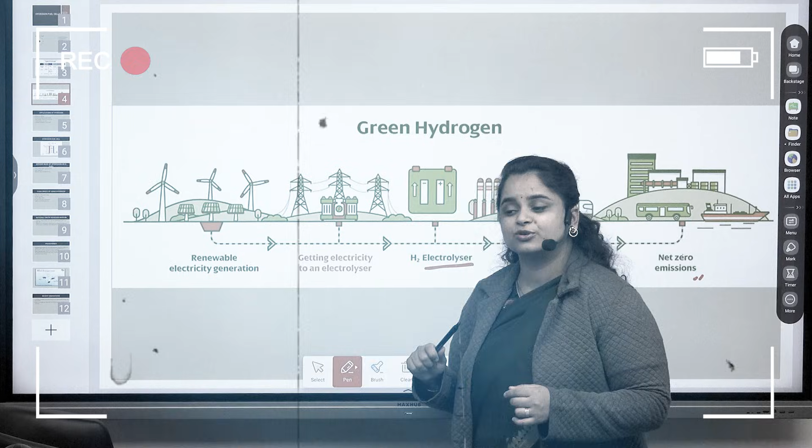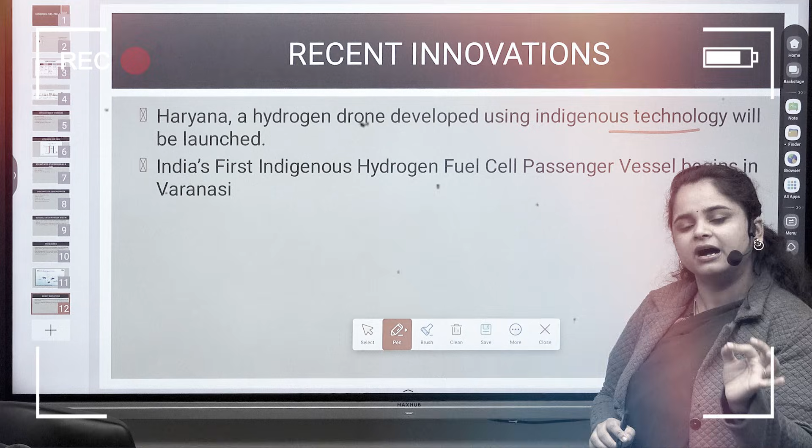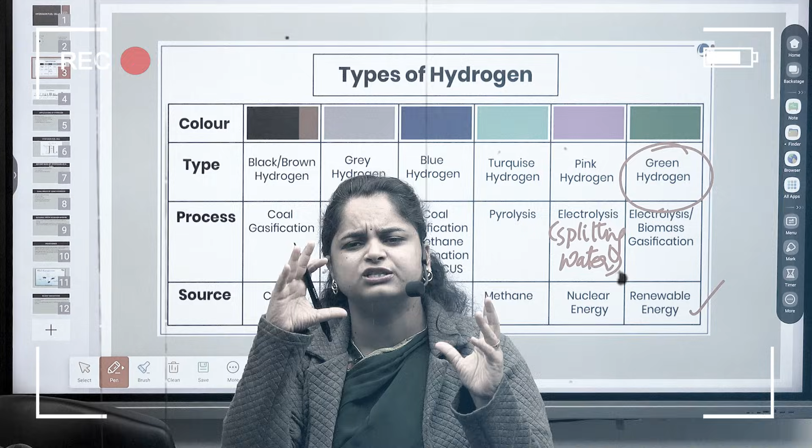What is, of course, India's roadmap? How are we planning to grow this or take this forward? So you have petroleum, it burns, it gives you energy. Hydrogen is not like that. The problem with electrolyzer is that we are not manufacturing any electrolyzers in India. Using hydrogen cell, they've powered a drone. It's a completely indigenous technology. Every part, every segment is made in India. India is specifically focusing on this. We are talking about green hydrogen, and India is the one who is promoting this on the biggest scale in the world. Our capacity will be immense, and we will be very soon exporting this green hydrogen to all parts of the world.

Hello everyone. Today we are going to talk about hydrogen fuel cells. This is one key area where there are a lot of developments taking place, and it is a very big mission, a very big motivation, something which the government of India is really promoting. In the energy sector, earlier we had solar. India was instrumental in pioneering the whole process of making solar energy a very big initiative, a very big endeavor. That's the similar thing which they want to do with hydrogen.

So we are going to understand the science behind it. We are going to understand how this works, what is the significance of this, and what is, of course, India's roadmap. How are we planning to grow this or take this forward?

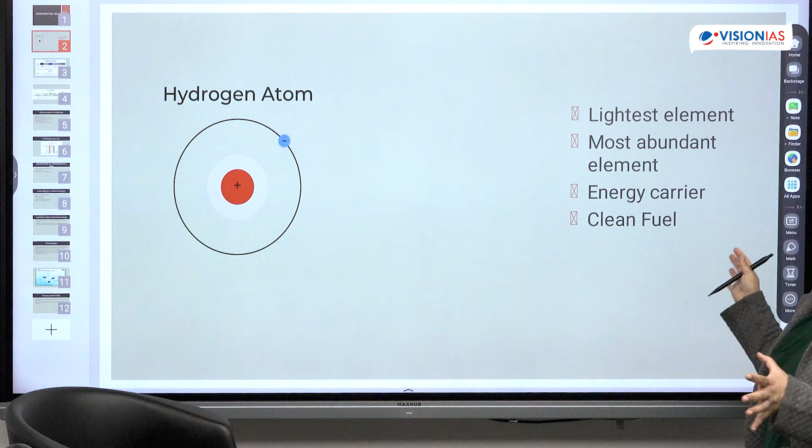First, let's talk about hydrogen, right? We all know about hydrogen. This is what your basic hydrogen atom looks like. It is the lightest element in nature. It's the first element in the periodic table. It is also the most abundant element in the universe. If we look at the entire universe and its composition, it is made up of hydrogen in the highest capacity. Now that means availability of hydrogen will not be a problem, right?

So here, the hydrogen basic atom structure. There is a proton. If you understand basic atom structure, you know about parts of the atom. So you have protons and electrons. This has one proton, and around this there is one electron. That's the basic structure of a hydrogen atom.

Now, because of this structure, or because of this being very light, its nature is, as you know, gaseous. So hydrogen exists as a gas, so it will have a very high volume. There's a lot of volume density associated with hydrogen gas, and movement or capturing it and storing that in that sense is one part which is tricky. Because if something is gaseous and you have to move it around, you will have to either have very large containers, because the gas is taking a lot of volume, so you need big, huge volumes of containers. Or you can liquefy it, transfer it in a liquid form. For that, either you need very high pressure, very intense pressure, or you need to bring the temperature to very, very low degrees. Extremely low temperatures can also help in reducing that volume, and that is what can facilitate or help in storage or carrying of that hydrogen gas.

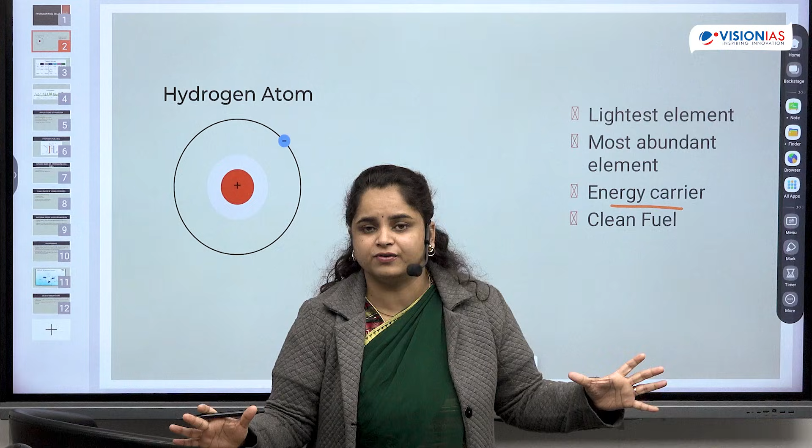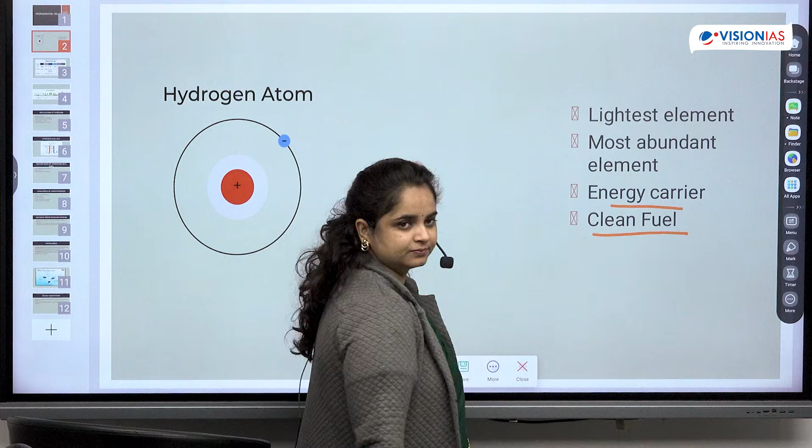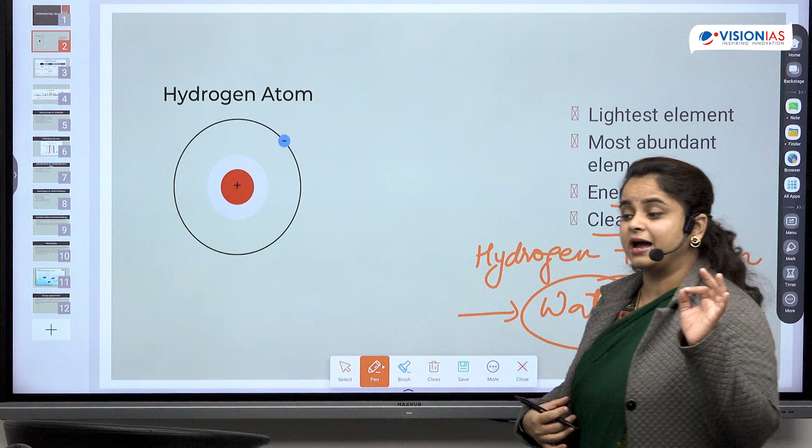Okay, so in that sense it's like a secondary fuel, so we use the word energy carrier. But once it is used as a fuel, it's going to be a clean fuel, because this is a basic concept which all of you will understand. So hydrogen along with oxygen, so that burning of the fuel takes place in air which has oxygen, and what you're going to get out of it is water. This is the brilliance of this whole process, that the byproduct which will come out, of course, along with this energy, that's why we are calling this the fuel. So the byproduct which is coming out is water. This is the big property which we want to extract by using hydrogen as a fuel.

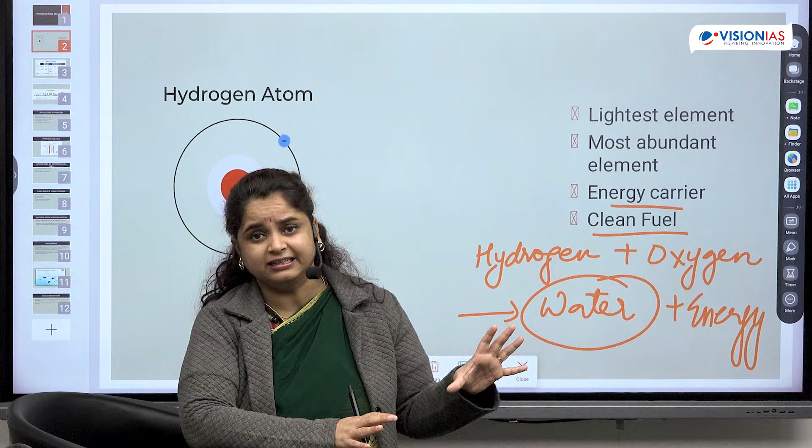Because the fuels which we are commonly using, the organic compound based fuels, petroleum based fuels, so everything from petrol, diesel, even things like coal, they are all producing byproducts which are harmful for us. You have harmful gases like carbon dioxide, carbon monoxide, then sulfur related gases, and different kinds of fuels also give a lot of particulate matter, harmful material being released into the atmosphere, and the problem which we mainly discuss in the form of carbon emissions. Carbon emissions is the biggest challenge to the environment.

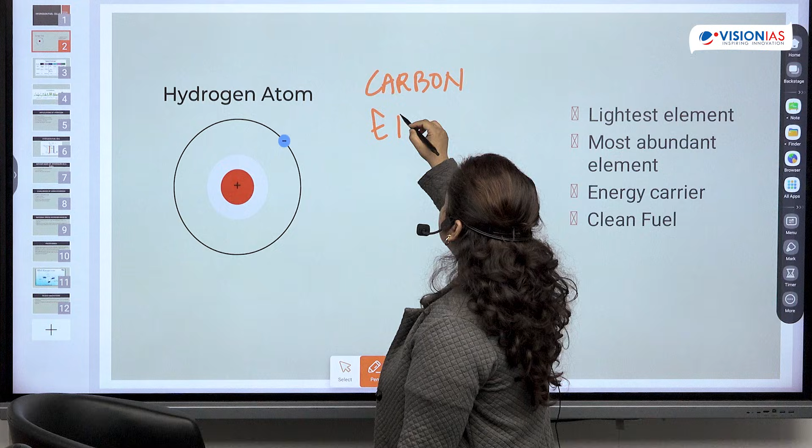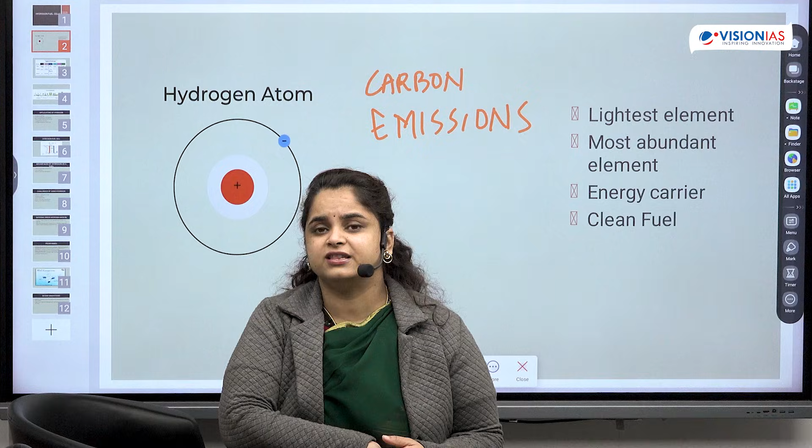Development in any sector is threatened because it becomes very polluting. It releases carbon emissions that increase temperatures of the world. You have global warming, climate change, increasing at a scale which is very difficult to manage with current technologies. So there is a need for alternatives, and hydrogen is a wonderful alternative because there is no carbon emission.

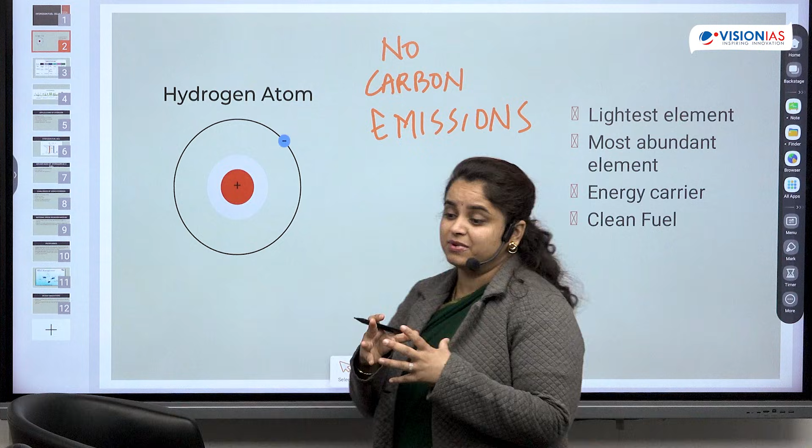In using hydrogen as a fuel, we can make fuel cells out of it. This is also our main topic. These fuel cells will use hydrogen and oxygen and will give you water, which is clean, non-polluting, non-threatening to the environment. So any goals we have for the environment would need hydrogen.

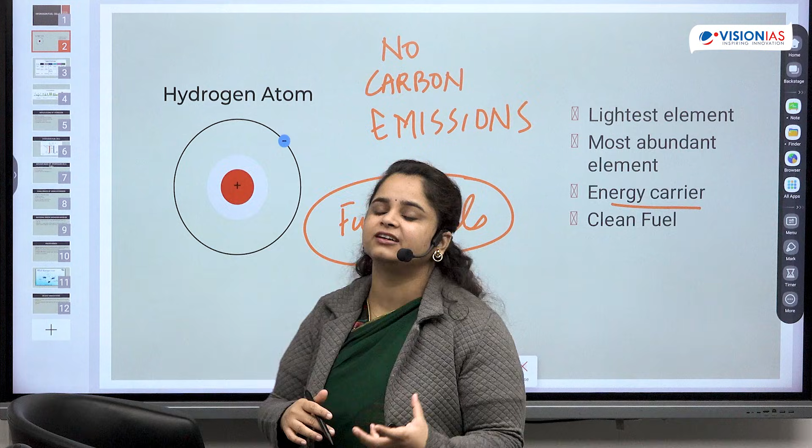We're trying all kinds of technology which can help us reduce carbon emission. One very promising technology has come in the form of hydrogen. The only question is, how is this hydrogen being created? It's an energy carrier, present in different things, and you have to extract it to be used. So that extraction process is very energy intensive. A lot of energy goes into actually getting usable hydrogen.

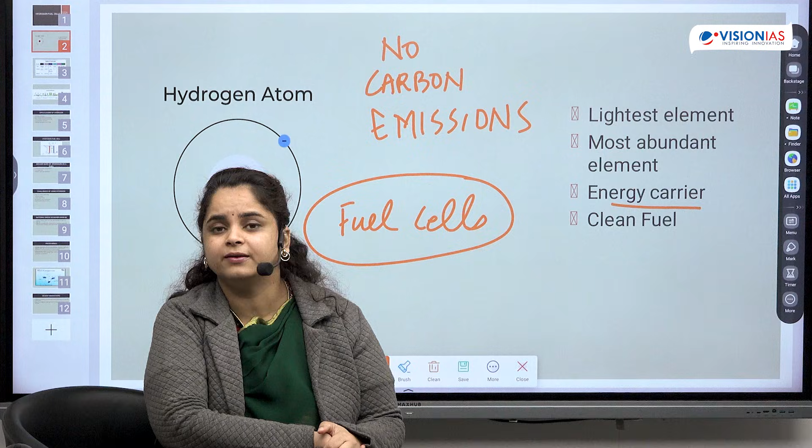So how is that process done? How is energy being used for creation of hydrogen? That will become the clear deciding factor of what kind of hydrogen we need. So we usually use the methods of production of hydrogen to give our understanding on different types of hydrogen.

This is a color-coded standard nomenclature. You give different colors to the different processes through which hydrogen is produced. This is very key for you to understand and know all of this. We'll talk about them one by one.

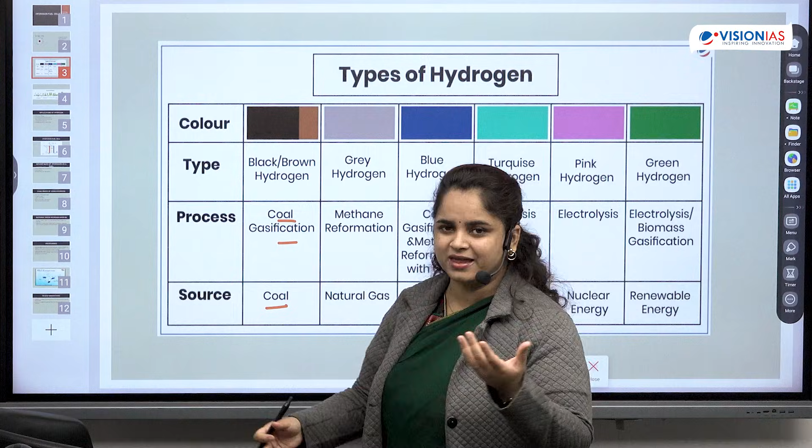First is black or brown hydrogen. This process uses coal, and coal gasification process is used to remove hydrogen. Like I told you earlier, hydrogen is present in fossil fuels, so from that we can extract it. In this they are using coal. Coal means there will be carbon emission, there will be carbon residue, right?

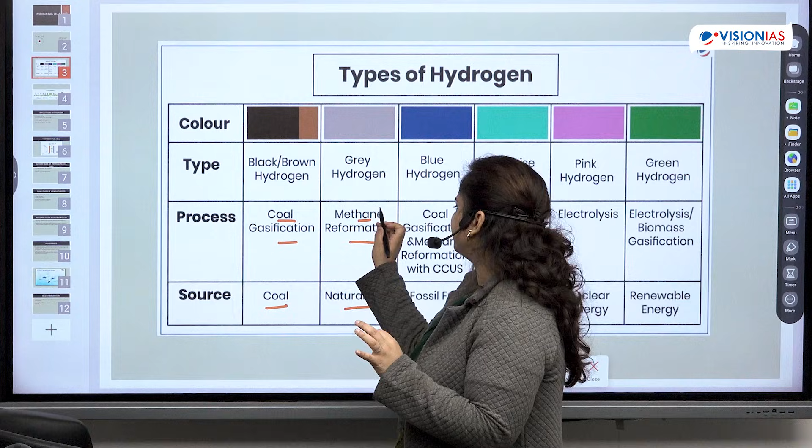Then you have gray hydrogen, in which you have methane reformation. This comes from natural gas. Natural gas has many things, but the key component is methane. So what they do is take this methane or natural gas, and along with this give steam at very high temperature, and as a result, hydrogen is produced.

This gray hydrogen is the world's most widely used process for producing hydrogen. In fact, more than 90% of the world's hydrogen is produced by this method, the gray hydrogen.

The big reason for this is it's very economical. Any industrial process, the cost factor is a very key thing for understanding if it's going to be used or not. Whenever we talk about replacement into another method, one of the biggest barriers is cost. The cost is so high that the industrial process will not become profitable otherwise. So this is the most profitable.

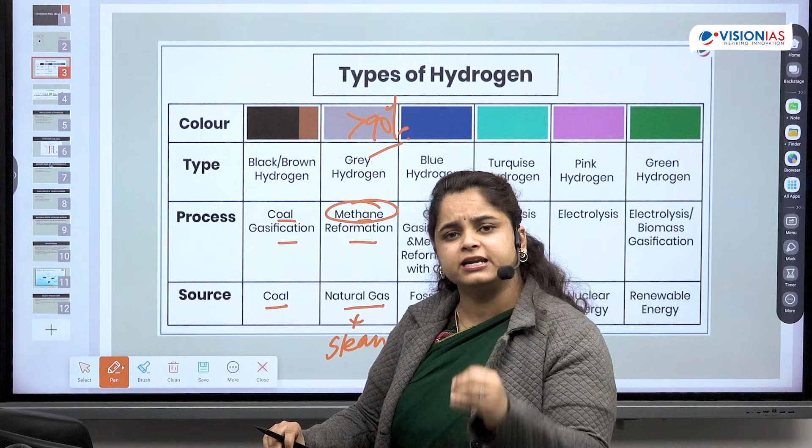Natural gas is available, and in that you can easily produce gray hydrogen. So it's the most widely used process globally. If I take you to specifics in India today, almost all the hydrogen being produced is gray hydrogen. Okay, so this is the key process.

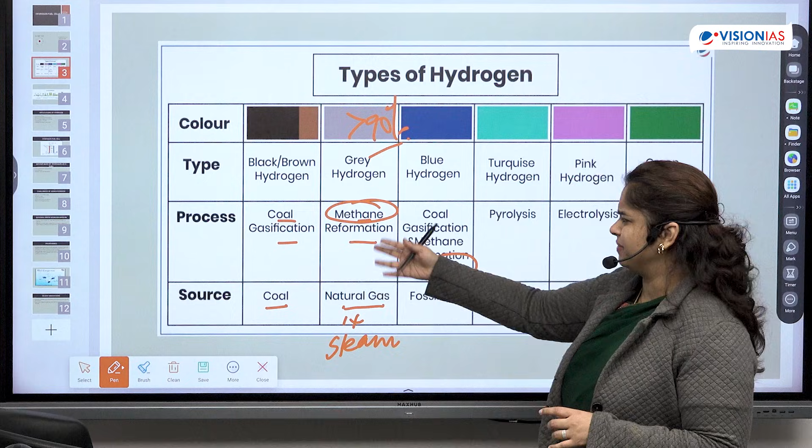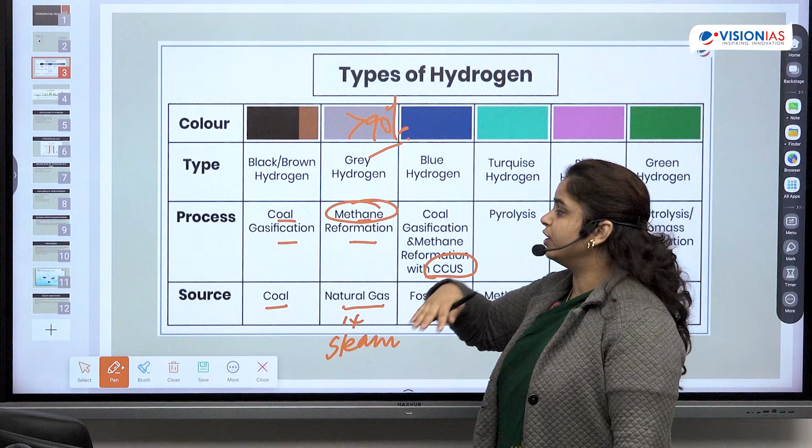Let's talk about others. Then you have blue hydrogen. This is coal gasification and methane reformation with CCUS. Now this is what is important, this is what changes. Methane reformation or coal gasification alone is just black or gray. But this point is the game changer, which changes it from being a carbon emitting to a non-carbon emitting method.

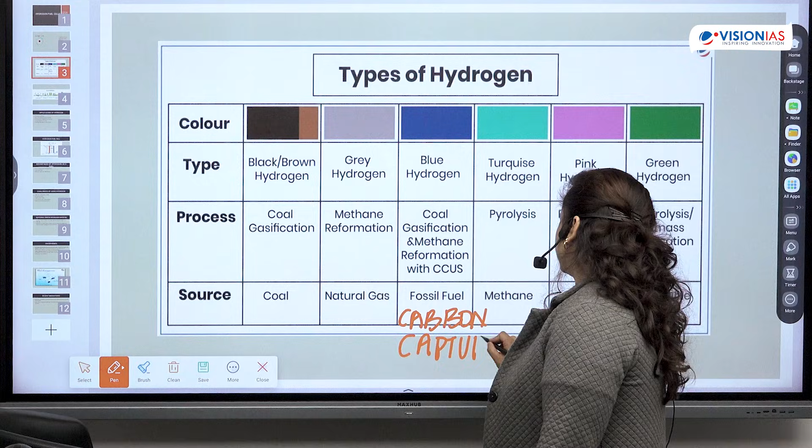What this means is a very important concept. So this is carbon capture, utilization, and storage.

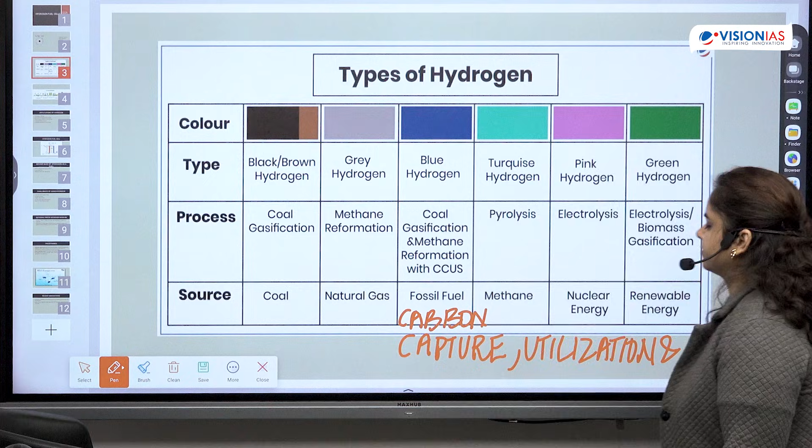This in itself is a very innovative technology. This is really being discussed a lot globally, a lot has been talked about it. If we talk specifically about our exam, the UPSC exam, they've also mentioned and taken up this topic in the exam. So what is done is, you take normal coal gasification or methane reformation, you will get some carbon emission.

But once that carbon emission is there, you have a process to capture that carbon, utilize it, or store it. There are methods available for that, the technology is available for that. That means ultimately no carbon emission comes out. So even if carbon emission or byproducts were there, you have captured it. So this blue hydrogen is also a good method, an environmentally friendly method. It will involve a lot of technology intervention because it needs some specific technologies, but on the whole, this is something which should be encouraged, which should be promoted.

India is talking about this blue hydrogen also.

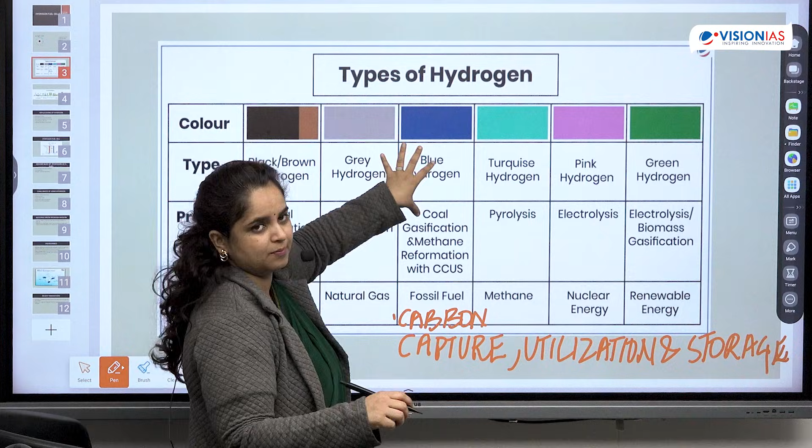Then you have turquoise hydrogen. Pyrolysis just means breaking down at high heat, at high temperature. So from methane, we can get hydrogen through this method.

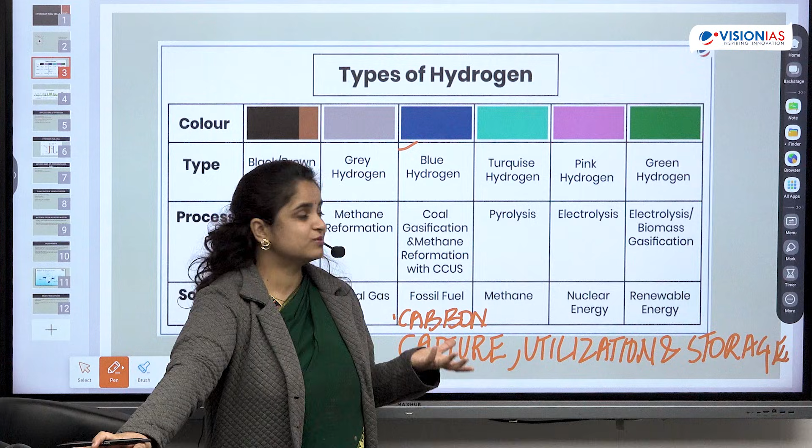Then you have electrolysis. Now this electrolysis is the method which is, you can say in a way, a very common method of producing hydrogen. Electrolysis means lysis or breakdown under the impact of some electrical energy or electronic process. So basically it is electrolysis of water or splitting of water.

So water is made up of hydrogen and oxygen. You split it, you get the two components, hydrogen and oxygen. So electrolysis is another process which is used to produce hydrogen, and in this case it's using nuclear energy. In nuclear energy also, there is no carbon emission. Of course, nuclear energy has its own challenge in terms of radioactive waste, and management of that waste can be cumbersome, but still a much better method.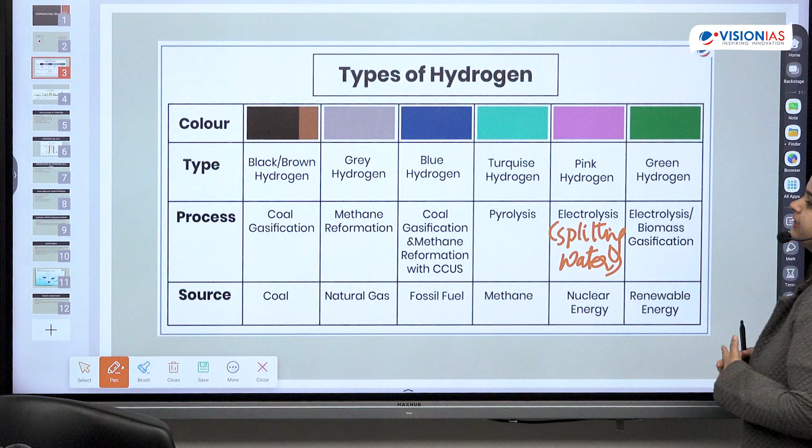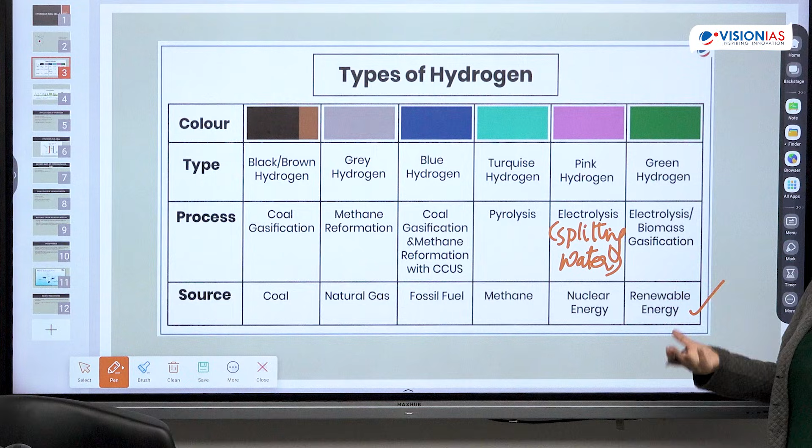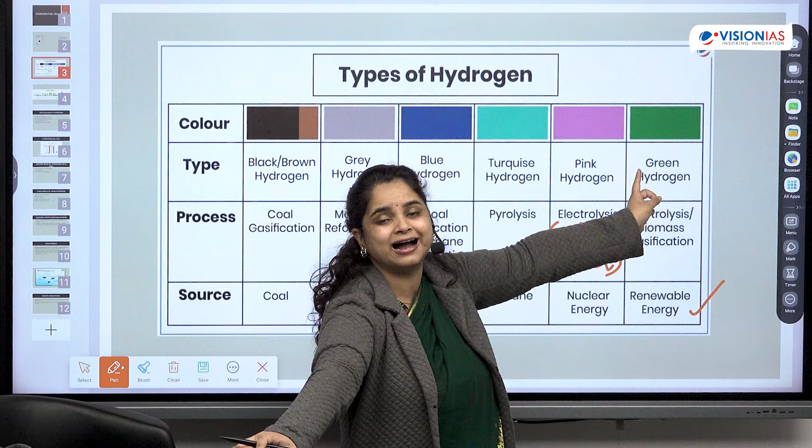And the last one is green hydrogen, in which there is going to be electrolysis, but it will use renewable energy. Biomass gasification. Biomass also is a way to capture and use the carbon content. Okay, so this point is key, that you are going to make hydrogen, but the process of making hydrogen is going to be from renewable energy sources. That means sources like solar, wind, hydro, sources which in themselves are not polluting or damaging to the environment.

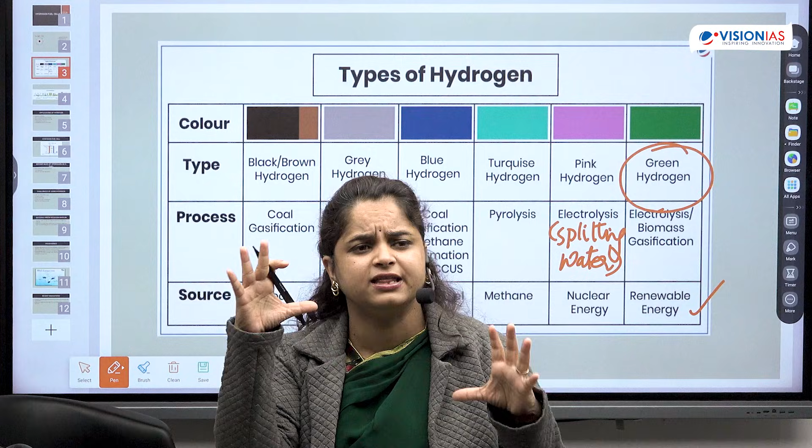Now, this one is the most ideal way to produce hydrogen. And India is specifically focusing on this. We are talking about green hydrogen, and India is the one who is promoting this on the biggest scale in the world, because our objective is that we have to start production of green hydrogen, and our capacity will be immense, and we will very soon be exporting this green hydrogen to all parts of the world.

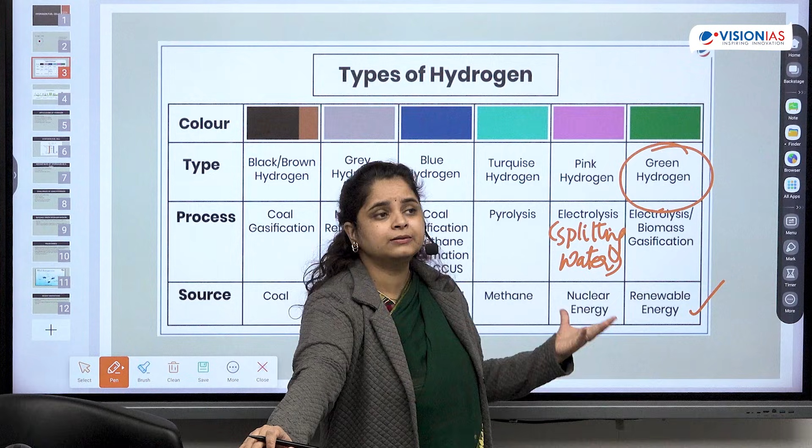Hydrogen will be very useful in the sense of all its properties as fuels. It also has industrial applications, which we're going to talk about. But along with that, this is also a way to encourage renewable energy production. Okay, and we have goals or international targets. Like we have this target of net zero emission.

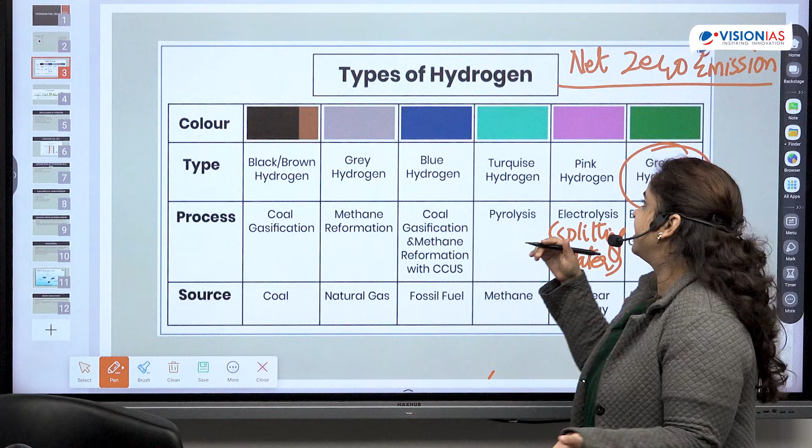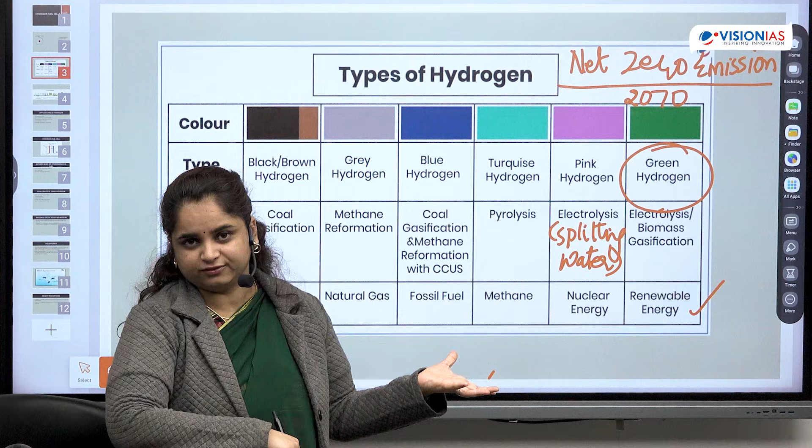If you go through the world protocols, like the Paris Agreement, different negotiations have been happening to reduce carbon emission, and India has set a target of 2070, that by 2070 there will be net zero emission. If we are releasing any emission of carbon, we'll also have ways to bring that down, so that our net becomes zero. And if we have to do that, we need alternative sources like hydrogen, and we need encouragement of renewable, non-polluting, non-emission sources, that is your renewable energy.

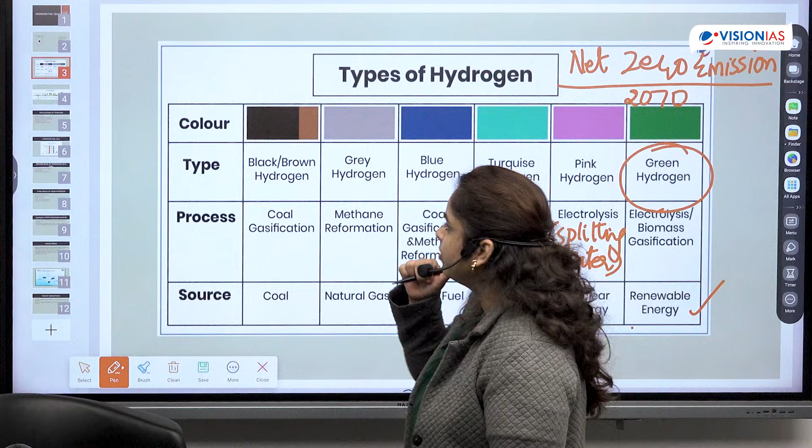Now, let's talk a little bit more about this green hydrogen. So, how that whole process of green hydrogen will work. Okay, so the process is called electrolysis, and the electrolysis process will need a special equipment, a special machine, you can say, which is called an electrolyzer. So this is what would happen. See here, just a simple chain of the whole process.

So we have renewable electric energy generation. This is the key, like they have windmills here. So wind energy, renewable energy. Then you have to get this energy into an electrolyzer. This is the machine, the setup where the electrolysis of water will take place. Then once hydrogen is produced, you have to distribute and store it. And then this can be used in different ways, in vehicles, in running different industrial setups, and ultimately that leads to net zero emission.

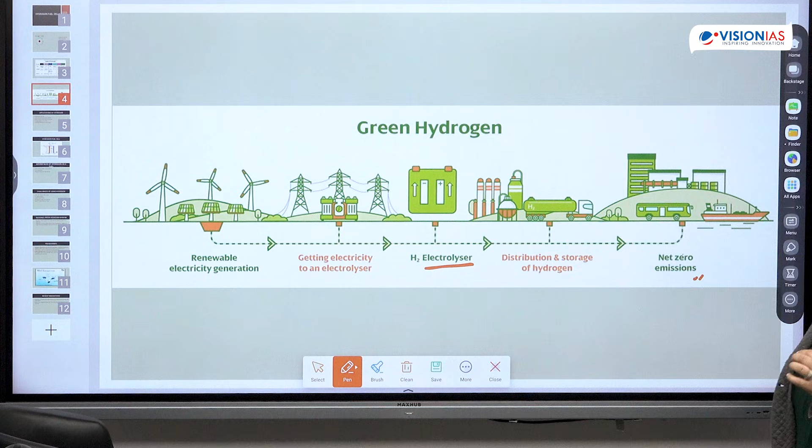Now, in this process, all the steps, in the present state of technology, are challenging or tricky for us. First of all, renewable energy is still expensive in India. Production is also not at a very wide scale. It's not very reliable as a source of power. So that's the first problem with this step. Then you have your electrolyzer. The problem with the electrolyzer is that we are not manufacturing any electrolyzers in India.

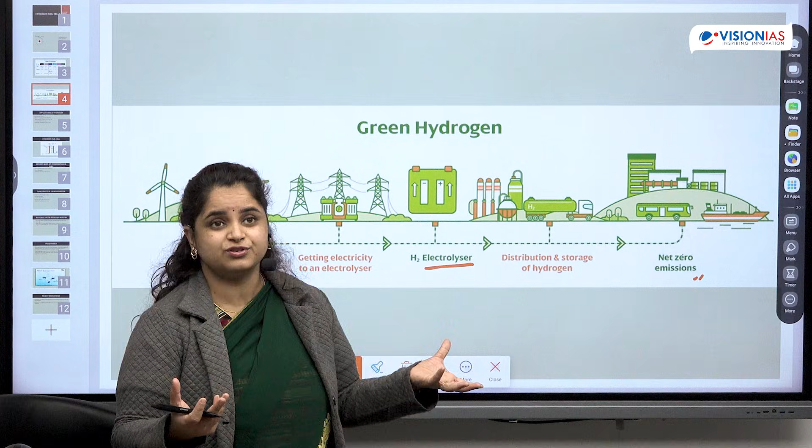Whatever electrolyzers are coming, they're coming from China. There's a lot of import dependency. That means, again, it's going to be expensive. We have started encouraging production of electrolyzers. It is beginning because the government is emphasizing green hydrogen, but still, this is a big infrastructure gap in our system. Then storage and distribution, I've already told you.

You have to either compress it at high pressure, and in that also there are challenges, leakages can happen, or use extremely low temperature. So you need that whole infrastructure to develop. We use the word cryogenic temperatures, extremely low temperatures, right? But there are safety concerns if some leakage or damage happens, because hydrogen is very highly inflammable. So that's the tricky part of managing, storing, and distributing hydrogen.

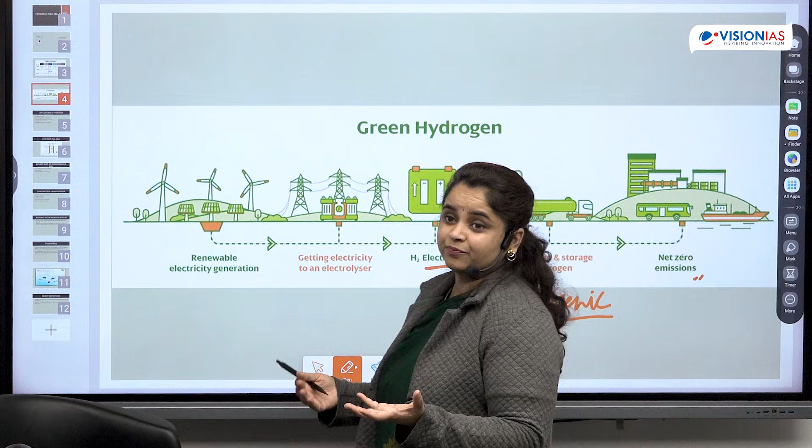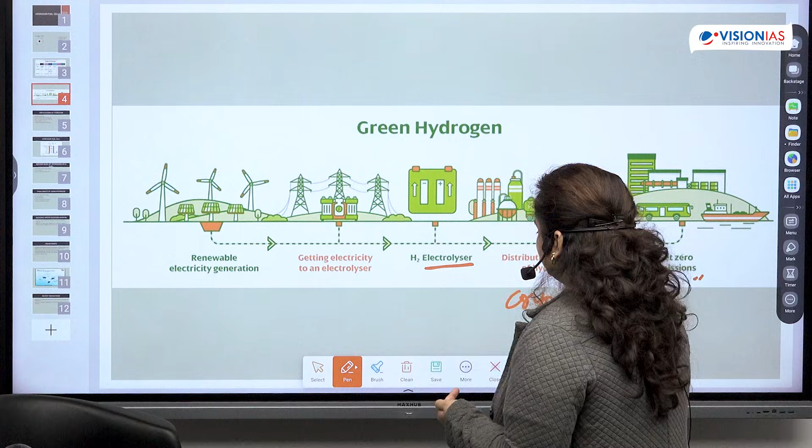And then, of course, you need equipment. If you're using it in a vehicle, you need compatibility, you need retrofitting, you need designing of vehicles which can use this kind of fuel. The government is doing things in that, like you have a vessel. Recently it's been in news that in Varanasi, an indigenously built vessel which will use hydrogen fuel has been brought in, but still there are a lot of gaps here which we would need to fill before this can really become big.

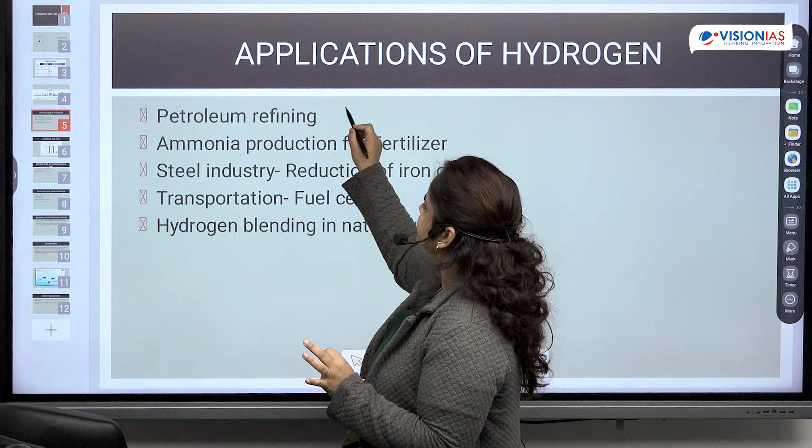Let's talk about its applications. Now I'm going to take you to the applications of hydrogen, not just as a fuel. Of course, as a fuel, it is important. We've stressed on that, but there are other applications also. See, currently, I told you, we are using gray hydrogen. And that gray hydrogen is mainly being used in two areas. One is petroleum refinery, second is the fertilizer industry.

Now, the advantage these two sectors have, especially petroleum: gray hydrogen is produced from natural gas. So where you have petroleum refining happening, natural gas is already there at that location, right? It's a component of petroleum. So the methane reformation process can take place on site. You take out hydrogen from that, and then you can use the hydrogen in different processes of refining, like desulfurization.

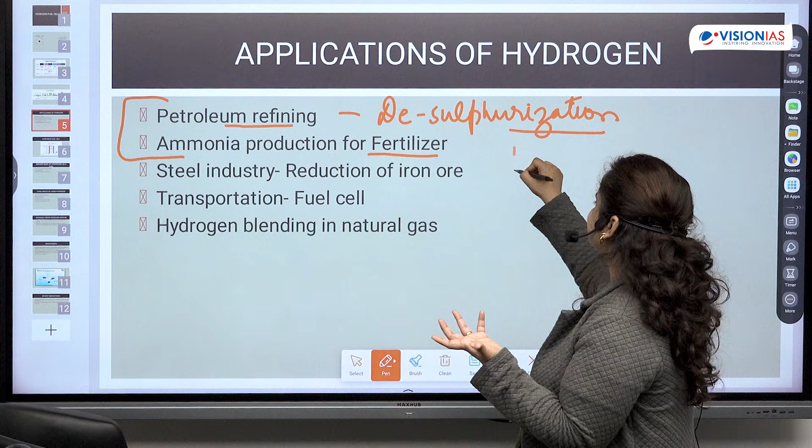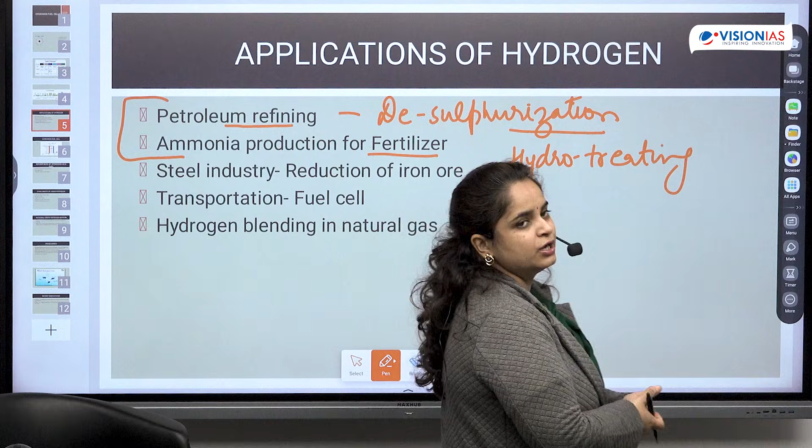Hydrogen can help in reactions which can remove sulfur from these petroleum products. We also talk about other processes, like hydrotreating, which will help in breaking down different parts of petroleum into smaller parts, and hydrogen can help in doing that. So hydrogen will be used in this process, and it can easily be produced on site. This is one of the key industrial uses of hydrogen at present.

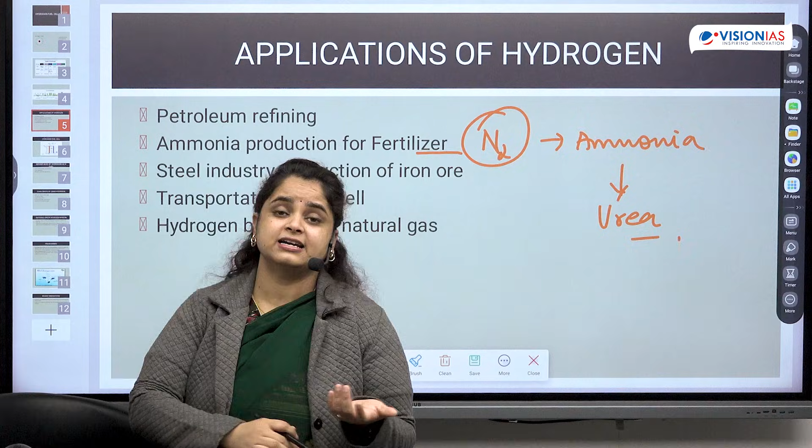The second very important part is ammonia production for fertilizers. So hydrogen and nitrogen, right? Nitrogen is another abundant gas. Hydrogen can combine with nitrogen, and that will ultimately give you ammonia, and ammonia can be changed into urea, which is a very key fertilizer. So the fertilizer industry needs hydrogen for production of ammonia and urea. So these two industries are already doing very well when it comes to use of hydrogen.

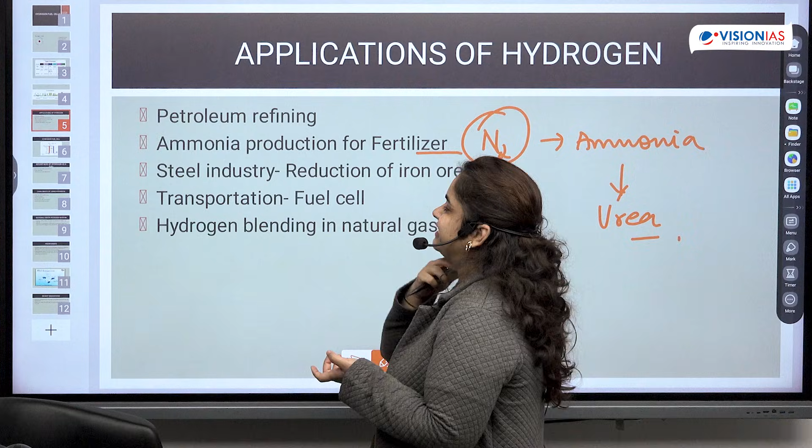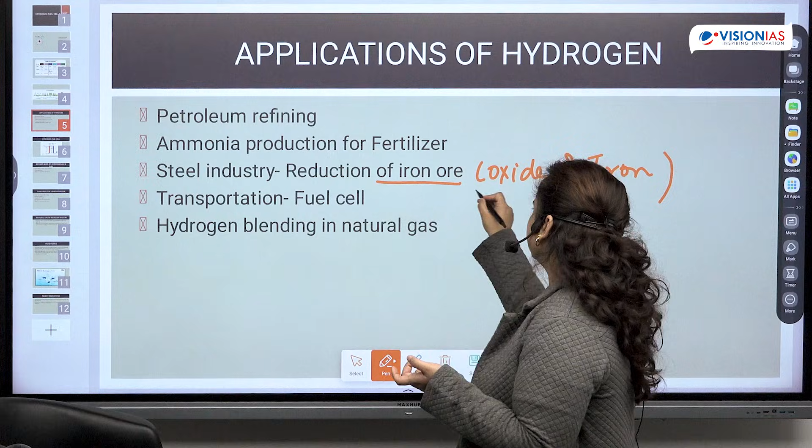Among the other industries where hydrogen use is now going to be encouraged, one would be the steel industry. In the steel industry, there is a process of reduction of iron ore. Iron ore basically is an oxide of iron. For us to be able to use iron, we have to remove this oxide, right? Currently, coal is one of the key things used to remove oxygen from iron, a non-renewable, polluting fossil fuel. Now instead of coal, we can use hydrogen for reduction of iron ore.

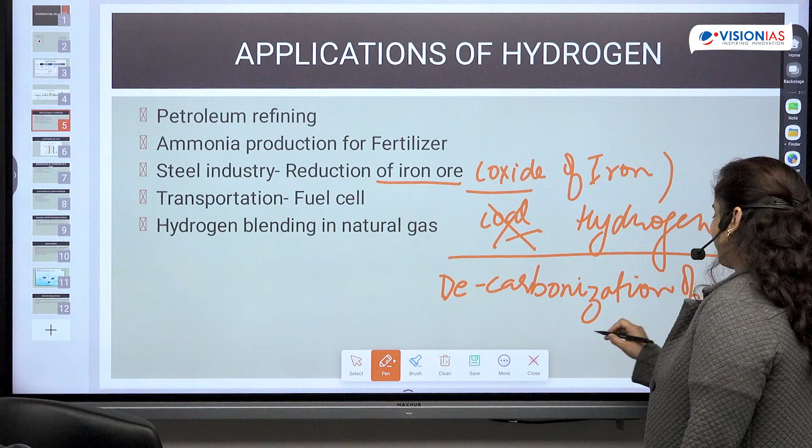So in this way, an industry which is very heavily reliant on carbon emission can actually get the freedom of not using non-renewable polluting fossil fuel. We explore this as decarbonization. This is a very big goal of the government: decarbonization of heavy industry. The industries which are heavily reliant on carbon, we have to give them an alternative, and the alternative is going to be hydrogen.

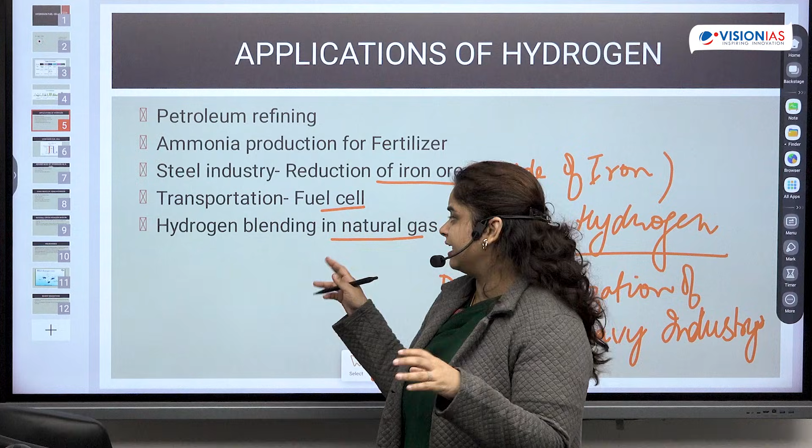Then the next option is in transportation. In transportation, we are going to create fuel cells which will use hydrogen and which can be used in different kinds of vehicles as their key energy source. Another option being tried in small pilot scales, which many cities in India are exploring, is hydrogen blending.

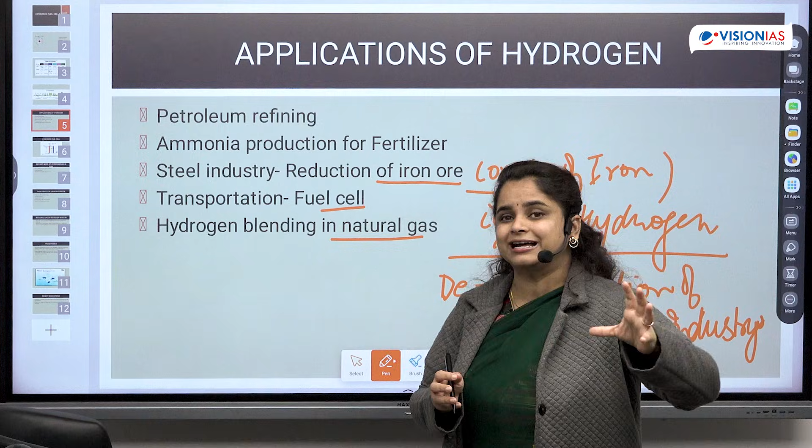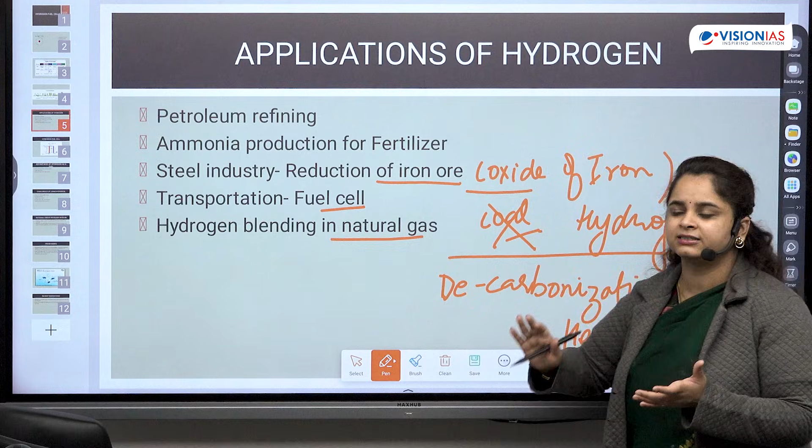See, hydrogen is a gas, natural gas is a gas. Natural gas is used in many places, like cooking gas, for example. So even if hydrogen does not become a complete replacement, it can be added in smaller amounts, again reducing the burden of fossil fuels like natural gas. So hydrogen blending in natural gas is what can be achieved.

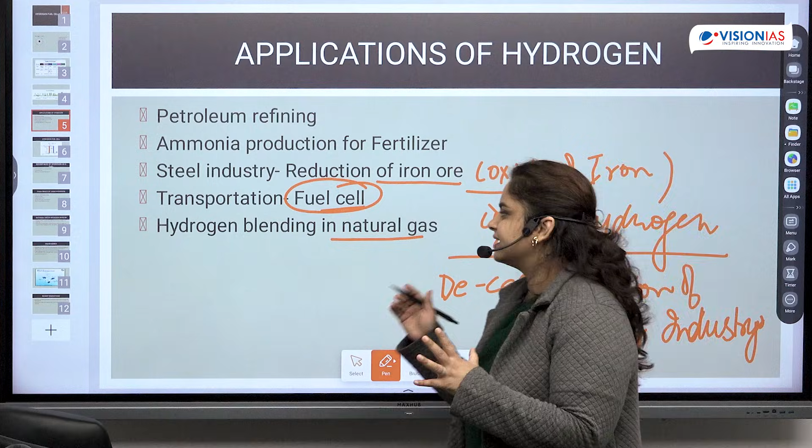Now we're going to discuss this fuel cell. What is the mechanics of this? What is the reaction which takes place? How does this fuel cell work? And why is this such a big game changer for us? So, hydrogen fuel cell.

Simple idea. I'm sure in school everybody studied about cells, where you have to draw those diagrams also. There will be an anode, there will be a cathode, and current will flow from one part to the other, right? So the idea of the cell, the technical logic of a cell or a battery, something which will conduct current, that remains the same. But here we have hydrogen and oxygen.

So what's happening here is hydrogen fuel, hydrogen gas basically, that's going to go inside, and it's going to break down basically, and the electrons will come out, and what will be left will be a positive hydrogen ion. So it's just one proton, right? The composition of a hydrogen atom is one proton, one electron. So if the electron goes away, then what's left is one proton. So this is there at the anode.

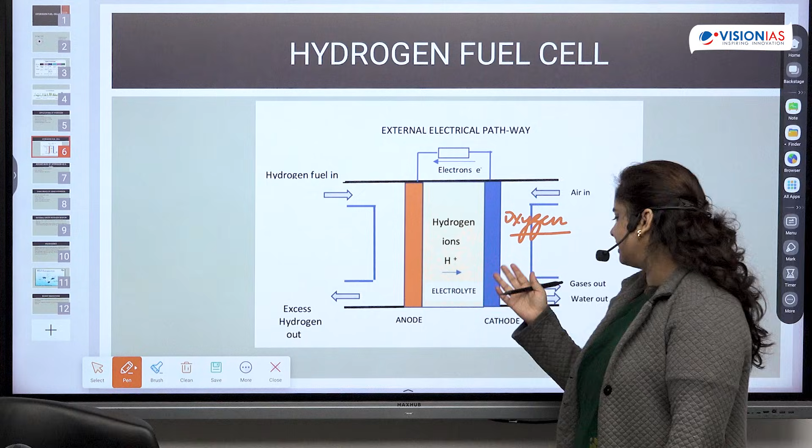At the cathode, you have air coming in. And the key component of the air which is going to be involved here is oxygen. So oxygen is coming in and it's going to react with the hydrogen ions which are present. There's like an electrolyte, a medium here, and the reaction will give you water. So whatever excess hydrogen is there, that's going to go out. Whatever excess gases are there after the oxygen is used come out from the air, and the water, the clean byproduct of the reaction.

The electron which is here is going to pass on here, complete the circuit, and that's how current is going to flow. Electrons flowing is what basically produces current, and this is your hydrogen fuel cell. Now in this, you have these membranes also in between, which help in creating barriers and allowing things to move across.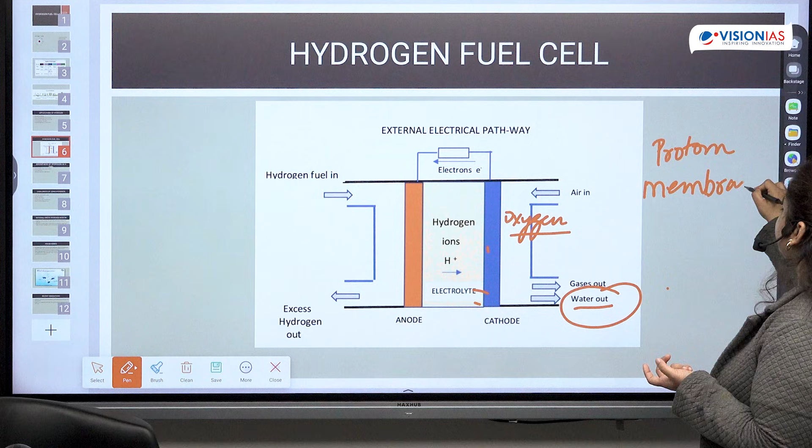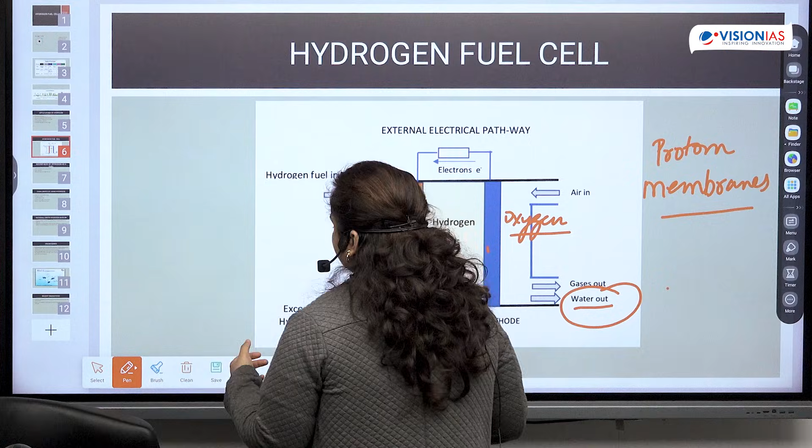So in terms of design, these membranes are a very big problem for us. We call them proton membranes, these ones. These membranes, at least as of now, we are not making indigenously. So even if we figured out a lot about the design and we are trying to do a lot of research, this is one component which we are importing in all cases because we are not able to create this on our own. So I'm stressing the challenges, the hindrances in each step, so that you can connect with the overall picture.

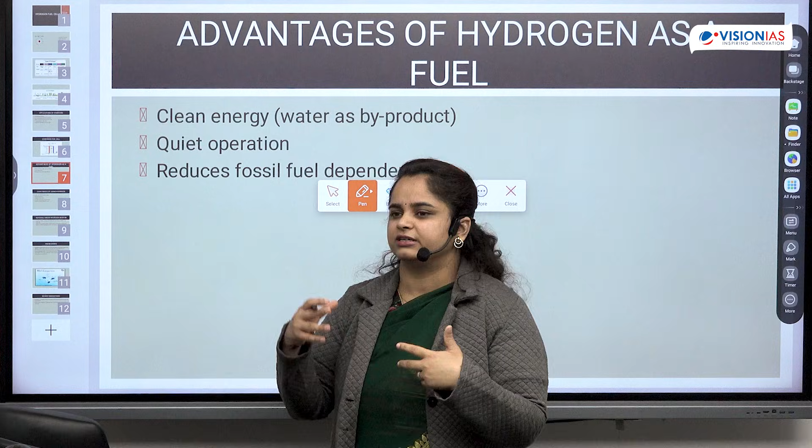Now let's see the advantages. We've already stressed about this, but let's see if you're using hydrogen fuel cells. Because this is convenient in size and operation, it can provide energy for a very long duration of time. So it becomes a very ideal thing to be put into vehicles. Different kinds of vehicles: naval vehicles, land vehicles, trains. So in all of that, we see application of this.

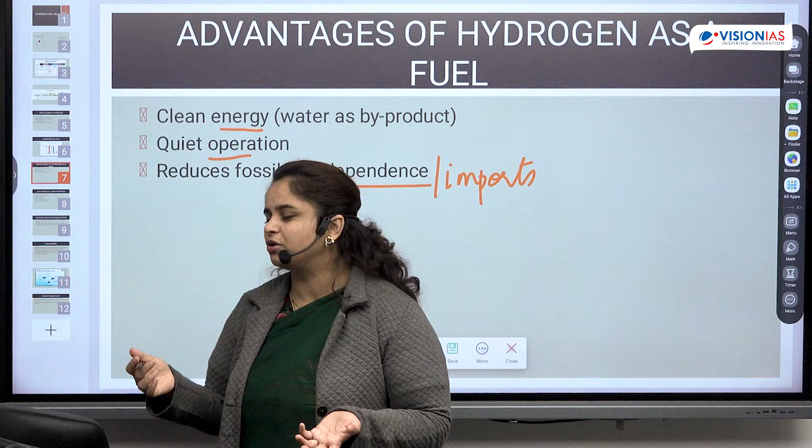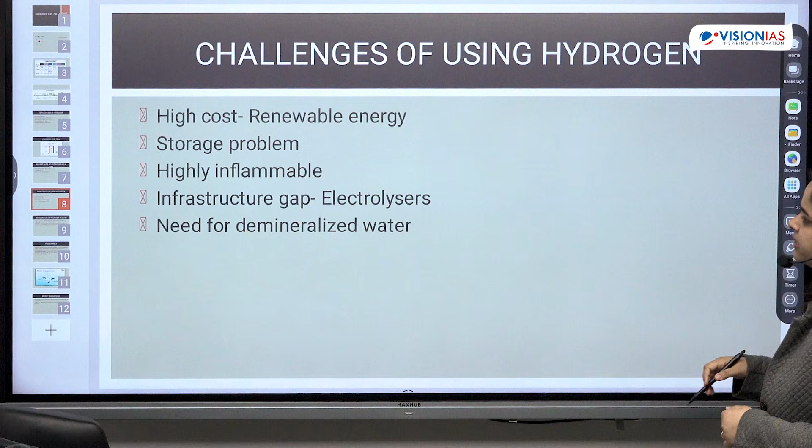I've spoken to you about all the challenges. I'll just list them together and summarize them for you. First is the high cost of renewable energy, right? Then there's a storage problem. Then, as I've already told you, this is highly inflammable. Infrastructure gaps: we are not making electrolyzers. So if you really want to improve our production of green hydrogen, these challenges are specific to green hydrogen.

Because we don't want to do any other kind of hydrogen. We want to do green hydrogen. That's the way to go. And if we talk about development or advancement in any sector, at this point of time where the world is placed, it's important that the sustainability factor is considered. And that is only happening with green hydrogen.

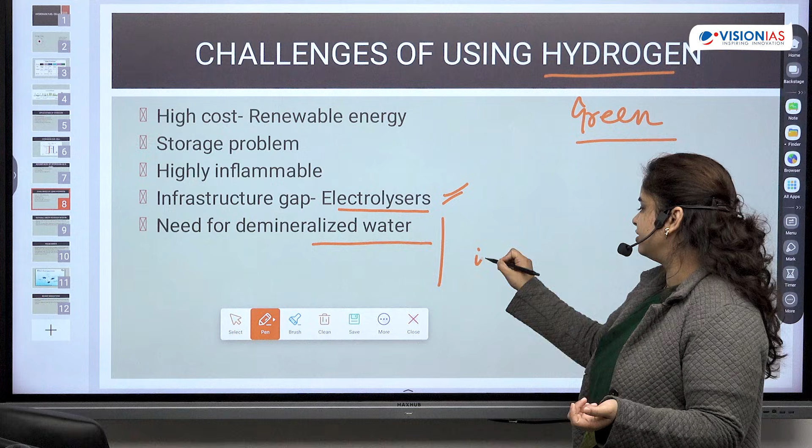Then you have another key point, which is the need for demineralized water. You need water to electrolyze, because you have to split water and then you get hydrogen. Now, this water is an issue in many regions. If you want to set up electrolyzers, you have to think about areas and their issues of water scarcity.

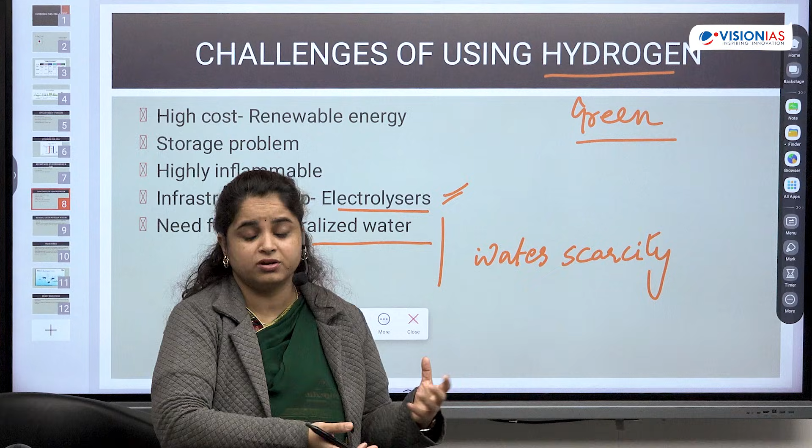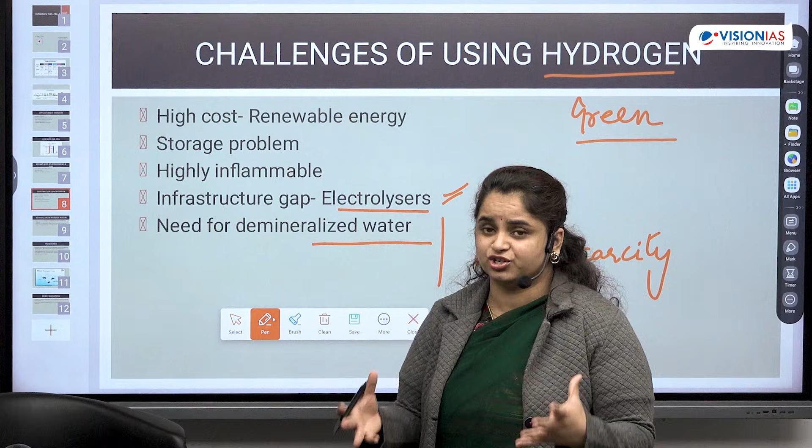There are a lot of areas in our country where having regular drinking water itself is very tricky. So you cannot really have water on a large scale for industrial applications. So water and availability of water in a particular region matters, and demineralized water means that using ocean water, sea water, will be very difficult because it is loaded with minerals. So in that sense, this point will have to be a very important consideration for setting up this whole hydrogen manufacturing in any particular area. This is another challenge to the process.

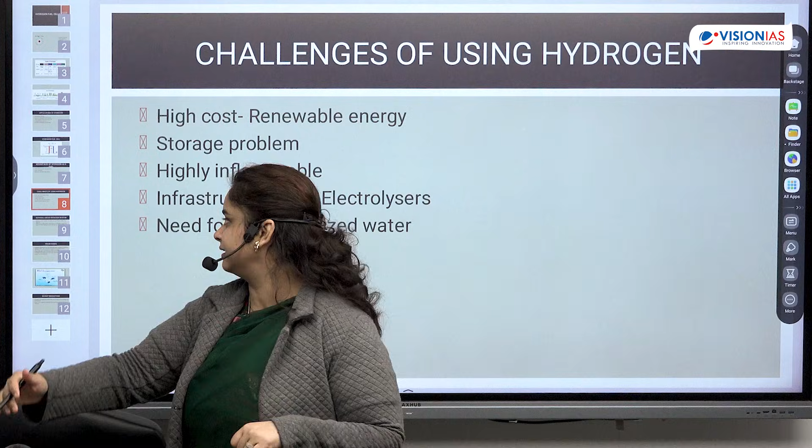Now we'll talk about the government initiatives. I have told you that the government is really encouraging this, and the seriousness of the government can be felt from the point that they have a dedicated mission, the National Green Hydrogen Mission. This is a very big deal. This could directly be a mains question for you, a prelims question for you. It's an important theme. There's a lot of promotion of this. The Prime Minister talks about this in all kinds of energy conventions, energy forums. So let's see what this is.

So the duration: the program probably started in 2023. So the first year 2022-23 till 2025-26, that was the first phase, and there's another phase from 2026-27, and finally it's going to end in 2029-2030. So the mission period is till 2030. And what is the objective? The objective is to make India a global hub for production, usage, and export of green hydrogen and its derivatives.

This is the goal. Even now, India has one of the largest production and export of green hydrogen, but they want to really increase it further, because this is an idea which they are really pushing, and it works very well for India's unique case, and it can be a very big way of getting revenue and economic benefit, because export here is one very key target. If this plan becomes a success, instead of India being an energy importer, and we are currently an energy importer and energy dependent country, India will become an exporter of energy. That's the goal, that's the aspiration which we have set with this mission.

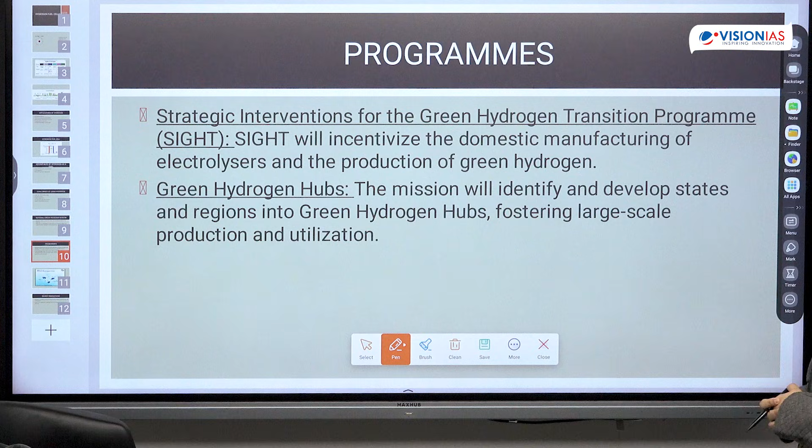There are 2 key programs under this mission which I want to specifically highlight for you. You should know this. This is complete, ready-made content for answering any kind of question on hydrogen. You'll be ready. But this you should note. So, Strategic Interventions for Green Hydrogen Transition, the SIGHT program. This is a program for incentivizing the domestic manufacturing of electrolyzers. So the first phase was mainly about SIGHT. I told you there are 2 phases, right? We just saw that in the National Green Hydrogen Mission. So the first phase's focus is SIGHT, electrolyzers.

Even if we start producing green hydrogen and electrolyzers are being imported, like I told you, electrolyzers would come from China. So it would mean a lot of cost. It would be very expensive. So we don't want that. If you want to reduce cost, you have to do this in-house, because otherwise that challenge of import dependency would be there, right? So SIGHT talks about domestic manufacturing of electrolyzers. First you set up electrolyzers, then you make green hydrogen from that.

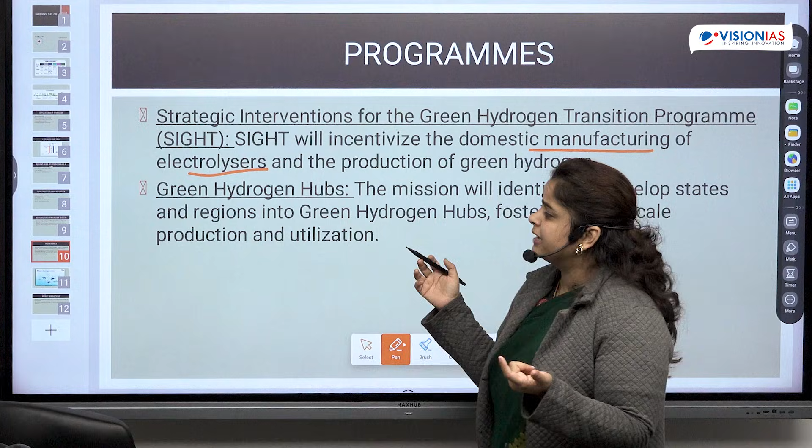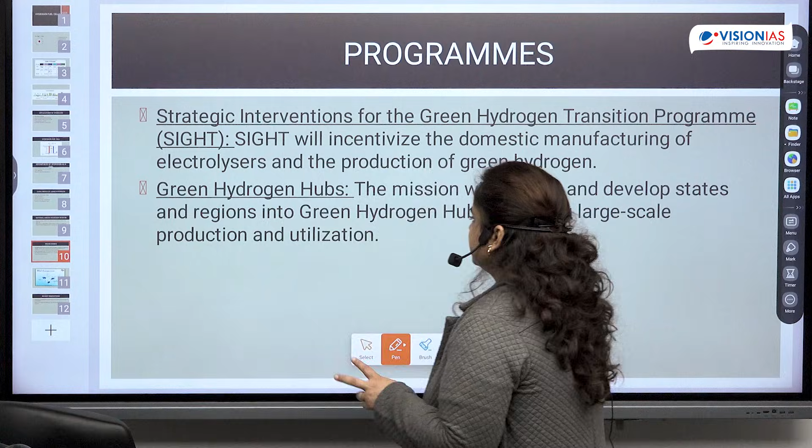Then the government is specifically setting up green hydrogen hubs. So there are regions which will be developed as centers for large scale production, utilization, and ultimately export of green hydrogen. Now there are 3 such green hydrogen hubs which have been set up. You have one in Gujarat, the Deendayal Upadhyay port, basically the Kandla port. Then you have one in Tamil Nadu, the VO Chidambaranar port, and in Odisha, the Paradip port. Why ports? Because ports in themselves are like autonomous units. They can have their own energy production. You need to fuel them. You need to have some kind of economic engagement also. So export facilities from there can work out very well. So these are the first 3 green hydrogen hubs being developed.

Along with this, time and again, we keep reading about different initiatives and innovations at private or government levels that give you an idea about the developments happening. So I have 2 more examples here for you. One is that in Haryana, there is a hydrogen drone. Using a hydrogen cell, they've powered a drone. It's a completely indigenous technology. Every part is made in India, and that's going to be launched. So another innovative application. Then you have India's first indigenous hydrogen fuel cell passenger vessel. It's going to be running on water, beginning in Varanasi. So these are real life applications of an idea, and a very important topic from the point of view of the exam. I hope I've been able to help you out with all aspects of hydrogen.